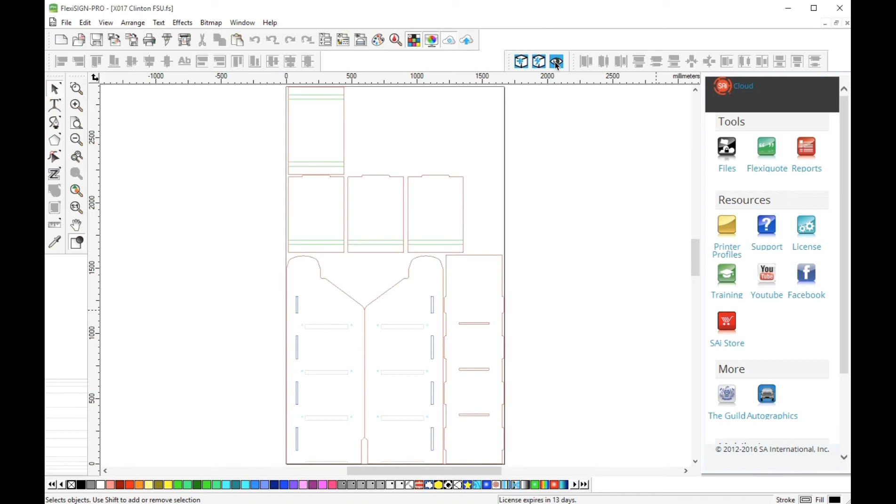This is the original design that Xanita board had, and it's made just like that.

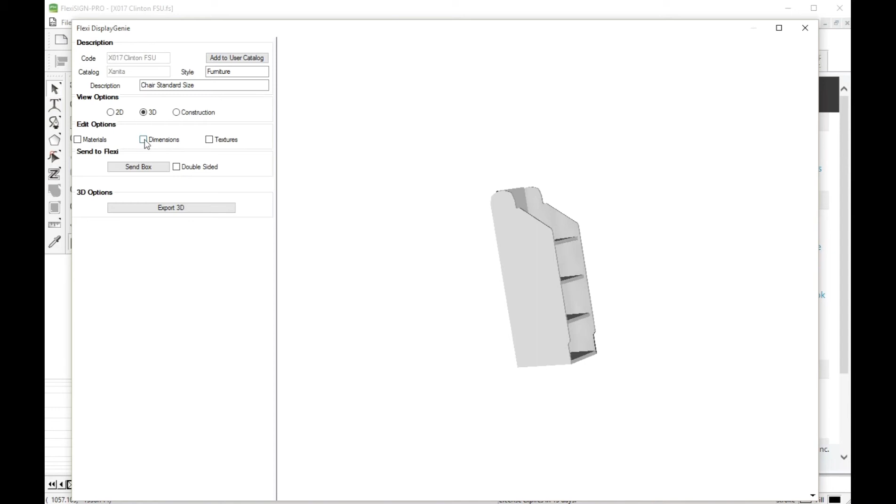However, let's see, if we go to dimensions, let's just go to 2D. We'll go into dimensions, and you can see we have a number of things that we can do here. We can change the width, the height, the depth, and this unit style. As I said, this style here is the original design, but that may not be the design you want.

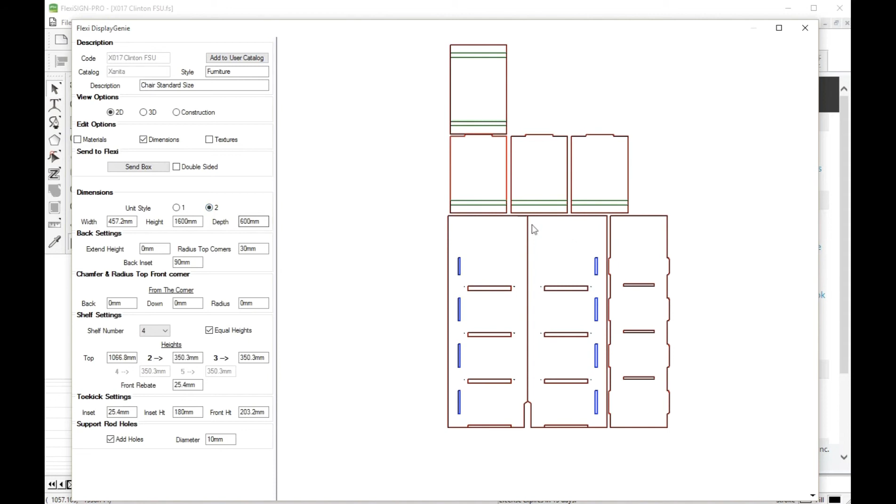So if you want to switch it to 2, it just gives you a squared off unit. If we go to 3D, you'll see that it still has the shelves in it and stuff, but we'll go back to 2D and have a look at it.

So as I was saying, you can change the width, the height, and the depth of the unit. You can also extend the back if you want to extend it up higher than the unit. So you just set it up to bring it up a little bit or bring it up a lot if we desire.

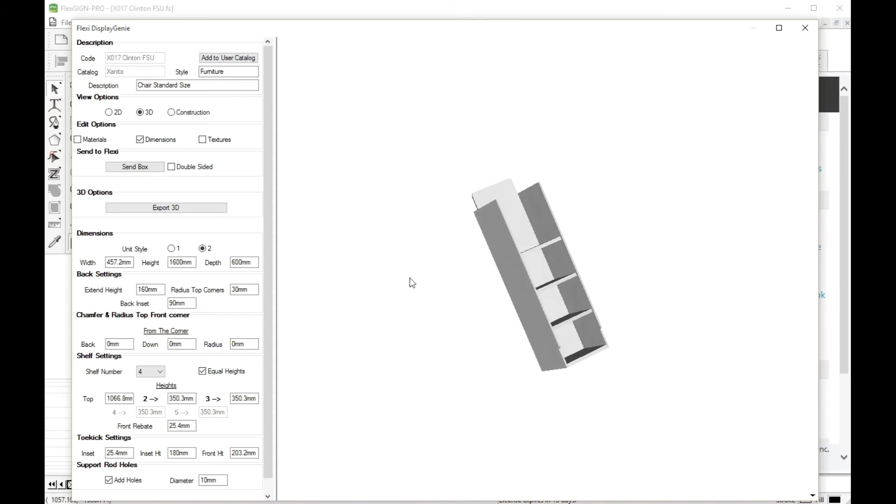That will make the back, let's just bring that back to 30. That gives you your radius ends, and when you do that in 3D, you can see the back sticking up above the sides of the unit, and that becomes important when you decide that you want to do something with a display there.

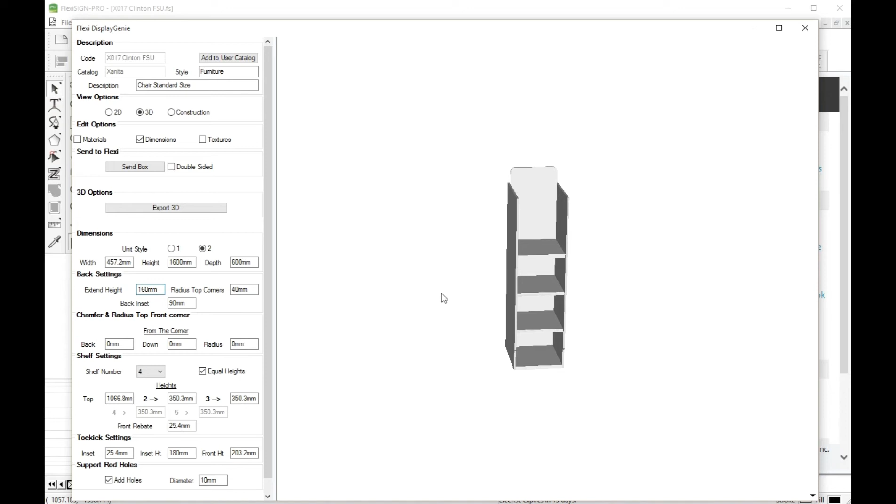You can also round those corners and change the radius on those corners that you have there. This back inset adjusts, I'll go back to 2D so you can see it, but it adjusts these slots here where the back panel fits in.

So if you wanted to change it to, say, 60, that moves it back out so that you have less of a reveal behind there.

Now, when you're in unit style 2, you can use this option here, the chamfer and radius, to chamfer or radius this front corner. So if I do, let's say 80 on both of these, it will chamfer that corner off as a 45-degree angle.

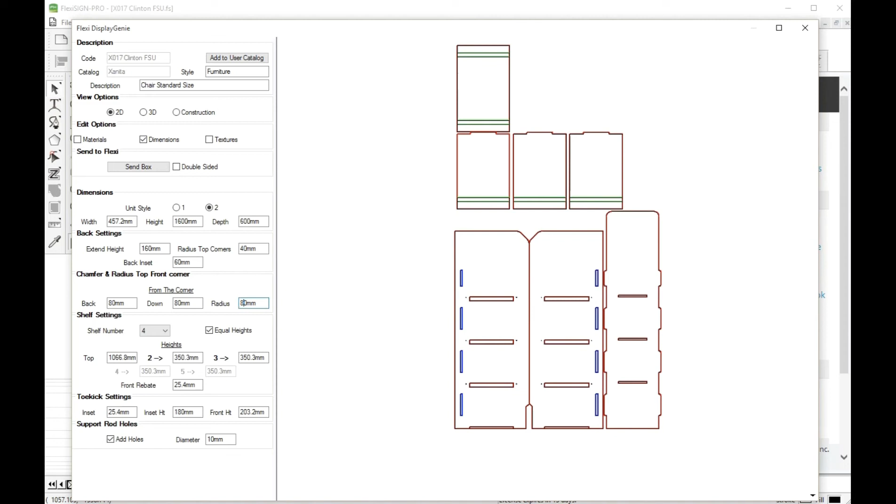Then I can also take and put a radius on that corner. If I use the same dimension, it will be a 45 or a rounded over radius there.

If we go to 160, you can see you can get some very different reactions from the radius. So we're just going to leave that now to take a look at it in a little bit here.

But you can also do these independently, so you could change one to 100 and leave the other one as it is on 80. Let's make a bigger change, let's go to 300.

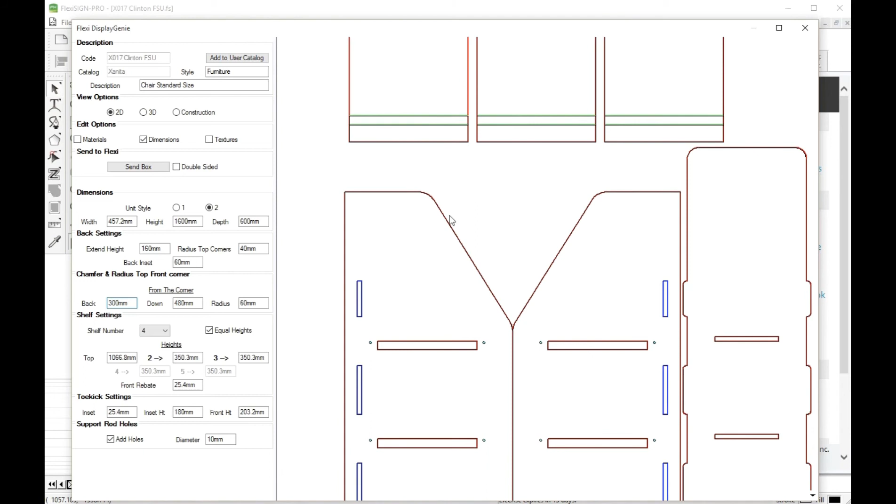We can see that we'll get a very different look on the front here. I'm going to change this to 480, and there you go. Now it's dropped down quite a bit, and you can see with that radius on there, it still gives a nice radius on these curves here.

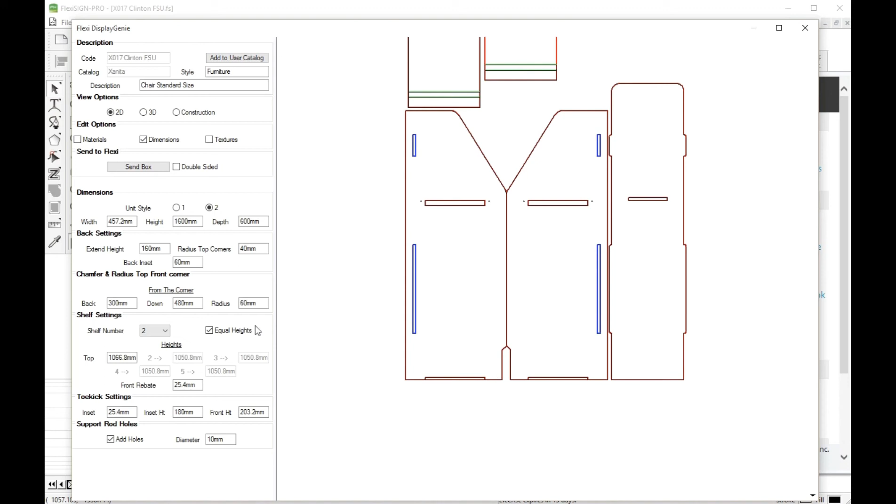The shelf settings, let's zoom out of this a little bit. In shelf settings, you can go between two shelves, which is just the bottom shelf and the top shelf. And the shelf sets above the support here, as well as on the bottom it sets above the support. We also can select between that and 6 shelves.

We can change, if we wanted to change the depth of the unit to, say, 500, and then the unit starts looking quite different than when we started out. You can also adjust the rebate you have from the front to where the shelves begin.

The toe kick settings are these settings down here. You can change, like, the front height is the height all the way out at this front edge, and if I make that to 300, I can change that angle.

Let's just do a 253 and see what that gives us. Not quite as steep an angle, but you can change that.

And then the last thing that we have on here is we have these support rod holes. These are for threaded rods that can go through there. And if you decide you don't want the holes, you can uncheck it, take the holes out, or you can change the diameter.

I'll show you just so that we can see how the holes are in there. You can put any size in there that you like, and that works like that.

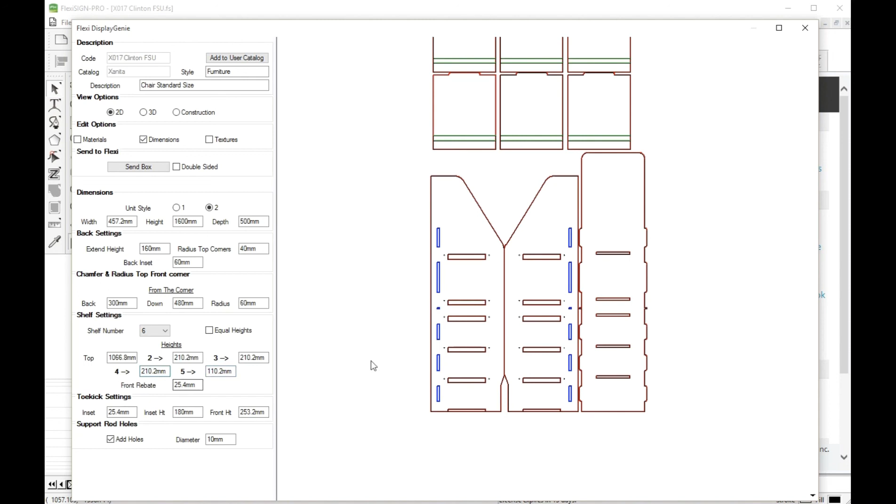Right now the shelves are set to equal heights. I can change that to where, let's say this one is 110, and you can see that I can change the heights independently, or when I click on equal heights, you're going to end up with equal between the top and the bottom shelves. So that's about it for this unit.